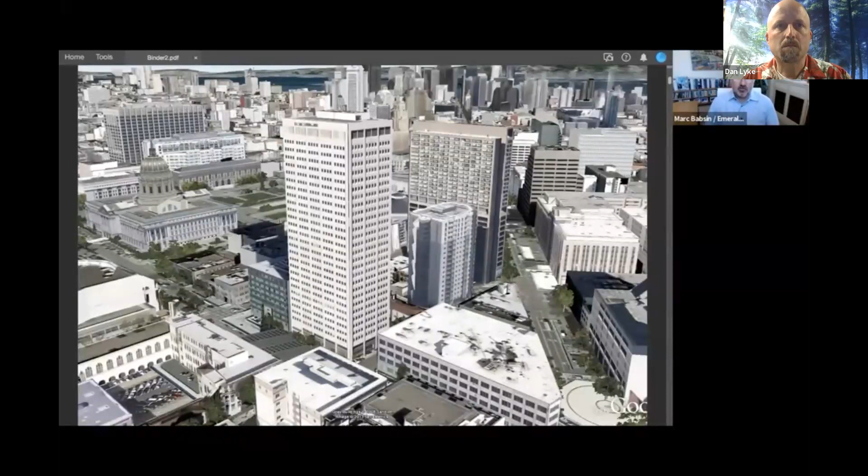100 Van Ness was the old AAA office tower. It was completed in 1974. It's 400 feet tall. It's brutalist design. It's got concrete skin with a steel frame, and it's very prominent in the skyline as it's the first tall building coming east from the Pacific Ocean. Next slide, please.

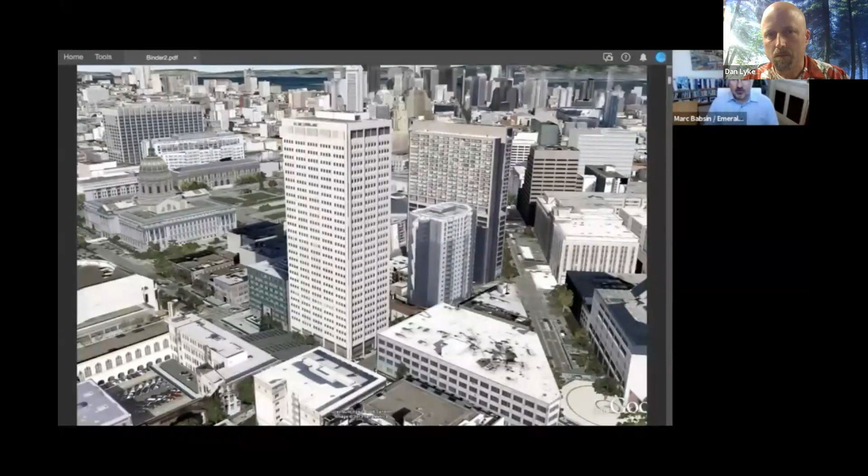AAA had 4 buildings, 3 of these green mid-century modern buildings. There was even a bridge, people might remember, over Hayes Street. And they decided in 2008 that they wanted to go to the suburbs. So they moved to Walnut Creek, and they sold all 4 buildings to a developer who planned to keep it as office, just to modernize it. Then you have Lehman Brothers in September of 2008 and the Great Recession. And by 2011, they hadn't signed a single office lease.

So you had vacant office buildings, which for a landlord is pretty terrible, but it also creates an opportunity for conversion, as we'll get to a little later. The equity, which was CalPERS, they were just tired of feeding it, paying every month on the loan, so they handed the keys over to the senior lender. It's good to be a senior lender in situations like this. It was an electrical union pension fund that took over and then brought us on as partners to figure out what to do next.

One of the things we considered was just reusing the buildings as office.

However, the mid-market Civic Center submarket had a 35% office vacancy, which at the time was the highest ever. We happen to be back at that number right now, but it was pretty shocking at the time. The other buildings that were our competition that were also vacant had large floor plates, which is what was attractive to the tech clients in the market. 100 Van Ness is much smaller at 15,000 square feet than what ended up being rented by Dolby, Twitter, Uber Square, all a block away.

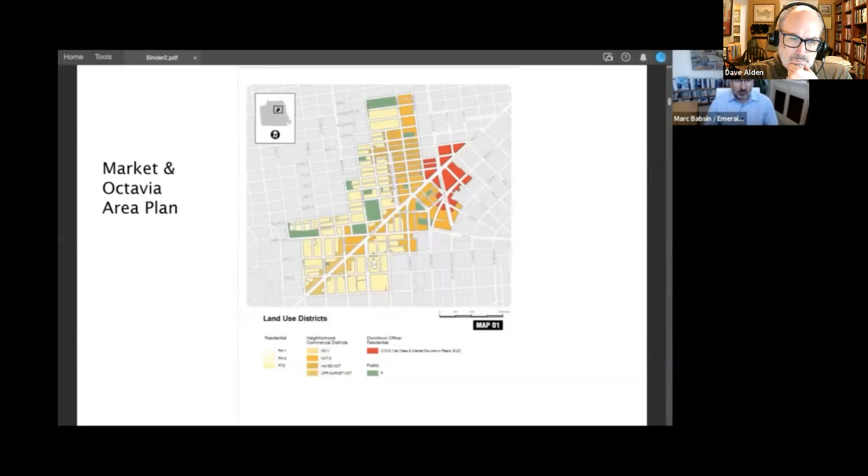So for office, doing TIs is going to be relatively low cost, but it was very unclear what the value of this building would be at the end. Residential, it's going to cost a lot more to strip out the building and convert it, but we were starting with a steel frame that we saved and foundations, and that's worth tens of millions of dollars. Also, there had been very little residential built for several years, so the rents were more promising.

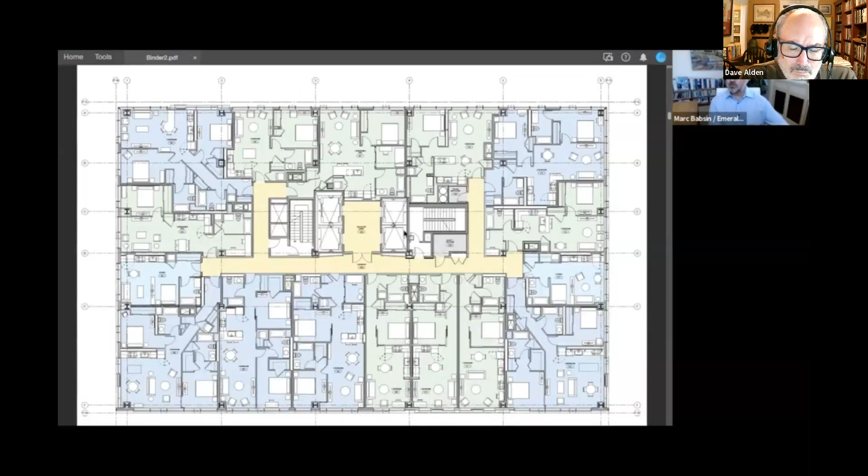This building also has a massive western exposure. Oh, excuse me, there's my phone ringing.

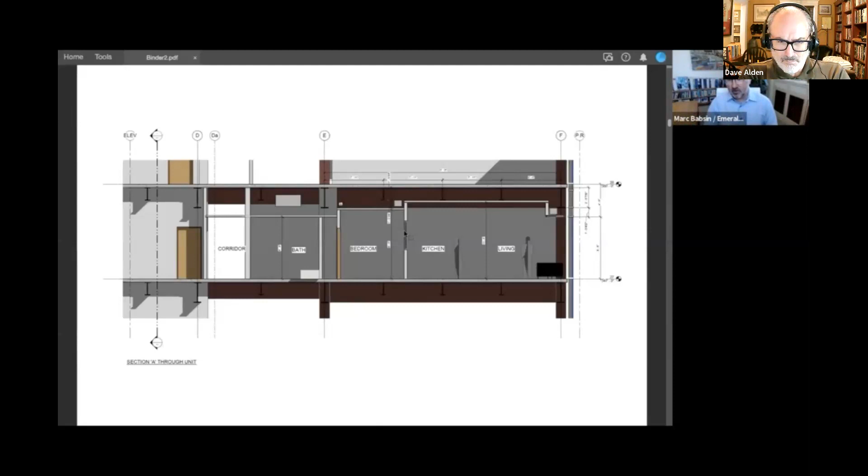Massive western exposure, which means it's going to bake in the western sun. So for the first time ever, Emerald Fund decided to do an air-conditioned building. We were able to do that because that horizontal band there is where the air conditioning fit in, and we still have 10.5-foot ceilings, which is very generous.

Depth, unit depth. These units, because of where the elevator bank was, are 44 feet deep. That's really pushing it. You really want to get into 30 to 35 feet. So that was a challenge.

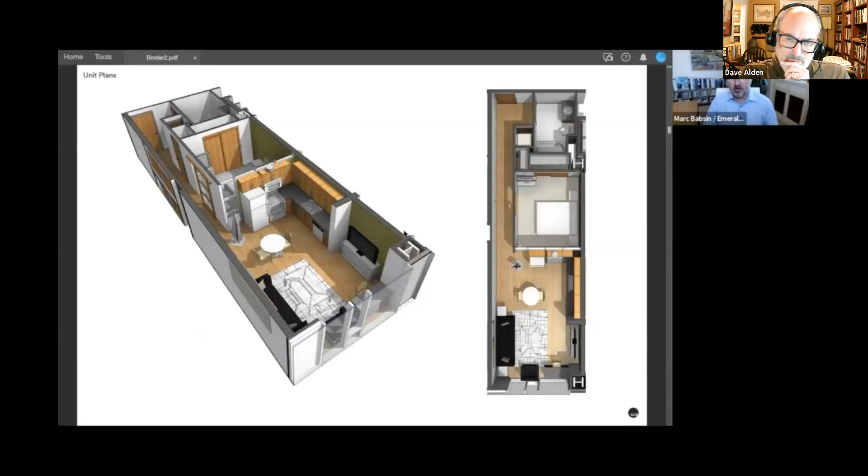We came up with the idea of, what if we put the bedroom in the middle? We put lights - you have to bring in light and air. We put lights over windows, over the cabinets and along the sides. The building department was okay with it. We were a little nervous about how the prospective residents would treat it, but to our surprise, they actually liked it a lot. We've used this nested bedroom concept a couple of times since then, and people like it. Other developers have kind of come onto it as well. So sometimes opportunities create innovation.

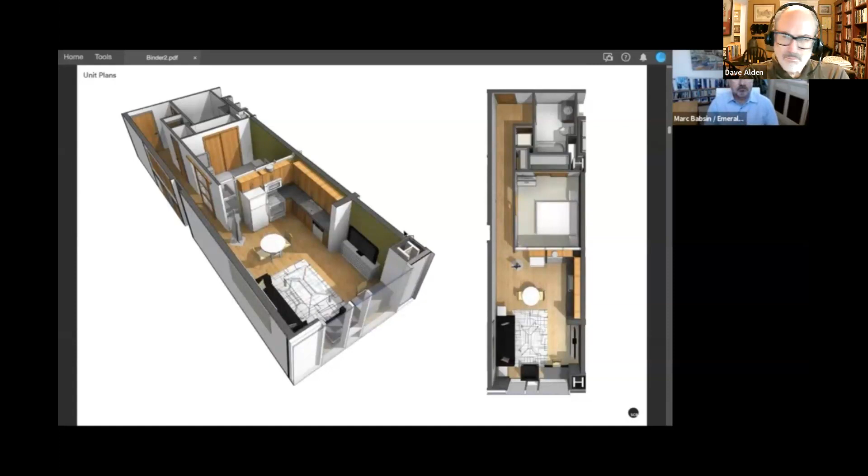Next challenge is, how do you build a building when your existing building takes up the entire lot? There was no open space, nowhere to put a tower crane. The project manager, Ross Asselstein, came up with what was initially a wacky idea that ended up being brilliant.

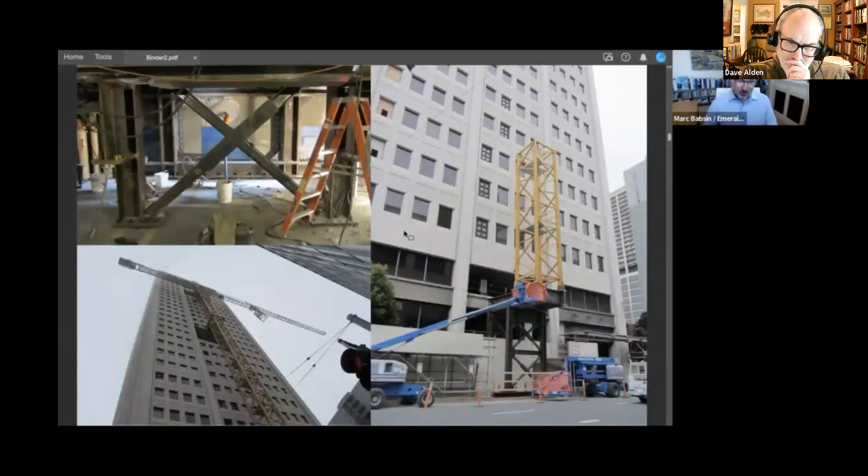Why not just hang it off the side of the building and have it cantilever above Fell Street? And so that's what we did. We had to take off 1,200 panels weighing tons each. This had never been done before, so the demolition contractor was figuring it out on the fly. There was some study, but then we took it off the building, moved it—it's very windy there—and put it on a truck.

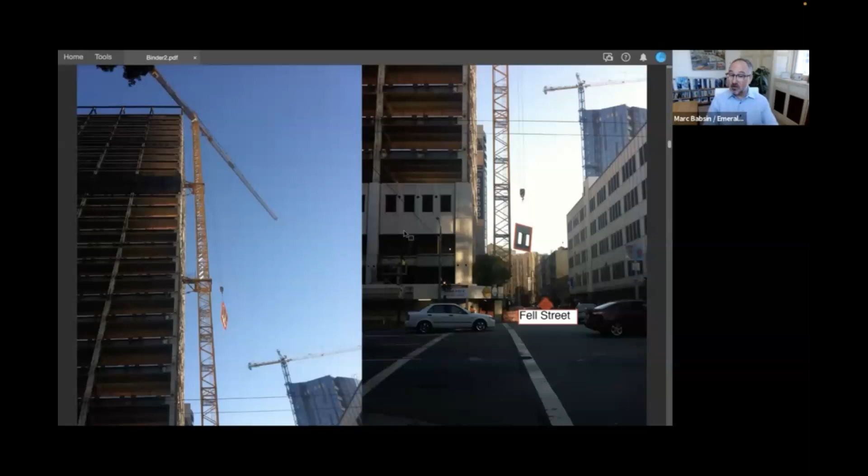What keeps a developer up at night is dropping a concrete panel on top of a car or a pedestrian on Fell Street. That didn't happen here. In fact, the project was named the best residential project in the country that year, in part for innovative things like this.

We had the luck of someone in Fox Plaza living across the street taking a picture every single day, so we had a great document of the stripping of the skin and putting on the new one. The reason we did this is, if you look in the top upper left, those windows were quite small, but you could see everywhere in this building. It's a view building, and they weren't celebrating the view. So we spent 6 months taking off the skin and 6 more months putting on the new one to really expand the view.

Another opportunity is the mechanical penthouse at the top of the building. Office buildings in the '70s needed a lot of area for their chillers and boilers, but residential buildings in 2012 don't need that much space. So we consolidated the penthouse and ended up with this phenomenal, one-of-a-kind 360-degree roof deck. I've been up there hundreds of times, and I'm still blown away by the view every time.

All the leasing tours end up here, and this is where we try to close the deal. This is 100, the tower, and at 150 we also took over the rest of the AAA site and built 150 Van Ness, which is basically the same size as the tower, just turned on its side—400 feet long instead of tall. It's 420 apartments plus 418, so 838 total.

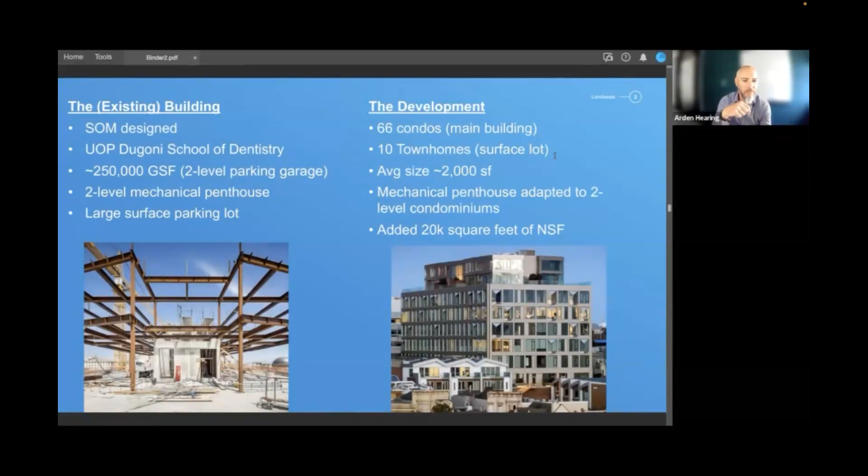Throughout the process we worked closely with our structural engineers, Holmes Structures, and were able to add about 20,000 feet of net saleable area by completely re-envisioning the building. We took the old entry to the Dugoni School of Dentistry and moved it to the ground plane.

You can see some of the heavy work on the left—that's almost a before, except we'd already taken out one of the levels on the north side of the building. You can see a lot of the steel bracing on the mostly concrete structure we had to go through, and how it started and how it went.

What we see is a theme here of potential retrofits of similar size and scale, but maybe not in Pacific Heights. It started with a great location, a great form. The building did not meet seismic code, as it was 50 years old. It really felt like it was built as a fortress, but it came with this entitled height. If you just had a surface lot today in Pacific Heights, you'd never get the neighbors, supervisor, or anyone else to endorse a 160-foot tower. So having that in place really streamlined our entitlements.

One of the constraints was really deep floor plates, which Mark mentioned was difficult to deal with. At 100 Van Ness, Mark dealt with that by nesting the bedrooms and doing multifamily—that's one way to do it. What we discovered at the Pacific is that, given the neighborhood, we were able to pencil large units for an even higher per-square-foot value. So we broadened the units, brought in air and light, and expanded the window line, pushing back 40 or even 50 feet in some cases, making them feel like actual single family homes. We had a lot of 2,500 and 3,000 square foot condominium units. We also anticipated a cost and schedule benefit given that the garage was built and the bones were already in place—what could go wrong is sort of how it felt.

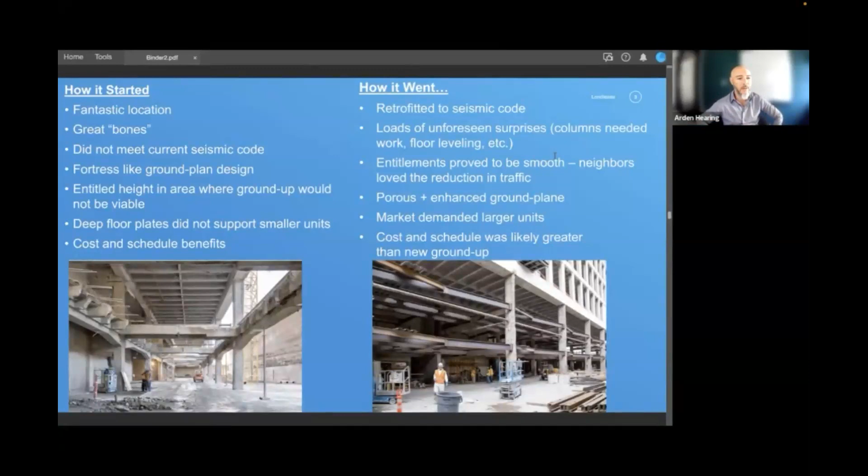So that's my short on the Pacific. I think there's one more slide, but there you can see the penthouse retrofit. Okay, thank you, and I think that was it there. Now let's flip ahead to the 2830 section.

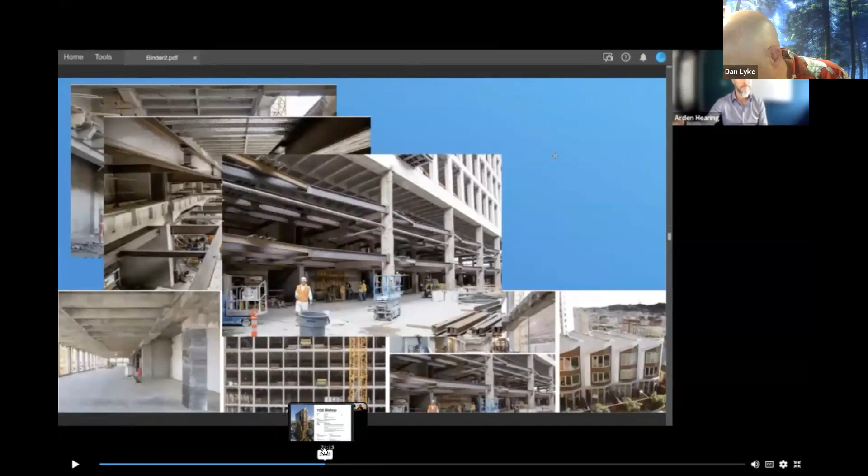While I'm seeking here, I recommend going back and watching this other section because it's actually the only part that had kind of 80 to 120% AMI market units, but there's a bunch about it that was kind of out of scope, so I understand why Dave said skip it. Anyway, here we go.

This is in Chicago. Obviously an iconic and much beloved building, and also a historic Chicago landmark. The towers, the landmark, and also some elements of the lobby. In this case, we converted the building into 162 luxury condominiums.

This building had some similar challenges in that the lower part of the building had extremely large floor plates. So in this case, we decided to actually remove some of the square footage and create 3 new facades facing onto a very tranquil courtyard in the middle of the plan.

That gave us more typical residential double-loaded corridors and depths in which to plan efficient and graceful units. In the tower, the challenge was that the floor plates were really too small for current office demands, but made excellent residential floor plates. The building had some beautiful details and ornate openings that we were able to leverage into the condominiums.

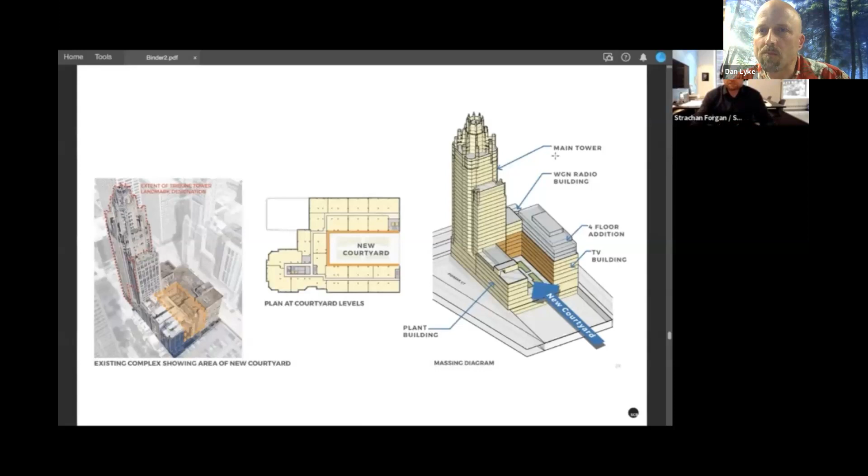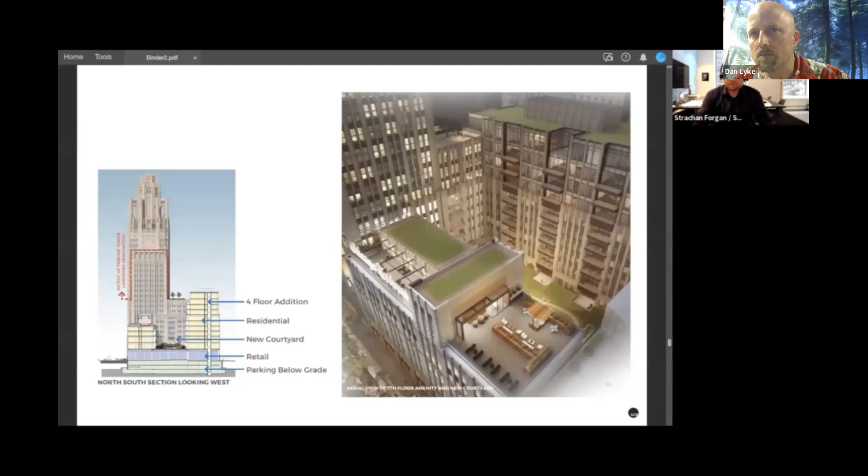This shows that kind of typical floor plate before you get up into the tower. Again, showing the existing original tower on the bottom left, the new pool amenity on the right wing, and then the new addition at the top of the page.

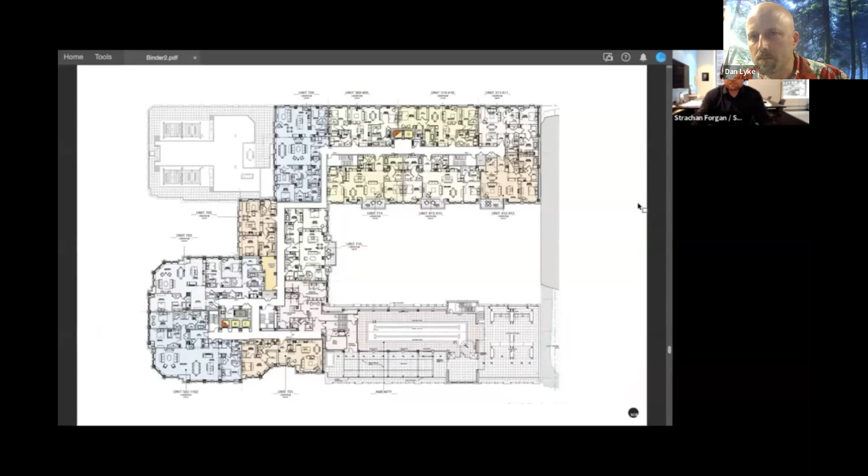From the new pool addition and the amenity, we're able to get these wonderful views out towards the Chicago skyline. We actually took the famous Chicago Tribune sign down, refurbished it, repurposed it, and put it back up so that some of the history of the building was maintained and became part of the iconography of the space.

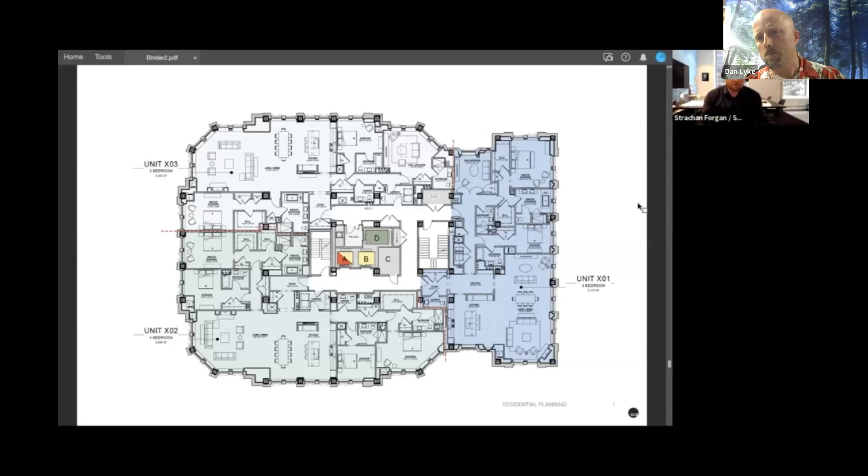To Arden's point, sometimes it can be a little bit easier if you've got large units to deal with the various nuances of the floor plan. In this case, we had 3-bedrooms that were roughly 3,000 square feet, and 4-bedrooms up to 4,000 square feet. So large luxury units that really are able to use a lot of the deep space in the middle of the plan for large closets and bathrooms and so on.

This is an example of one of the 4,000 square foot, 4-bedroom units that sound like huge units in comparison to what we work with in the Bay Area typically.

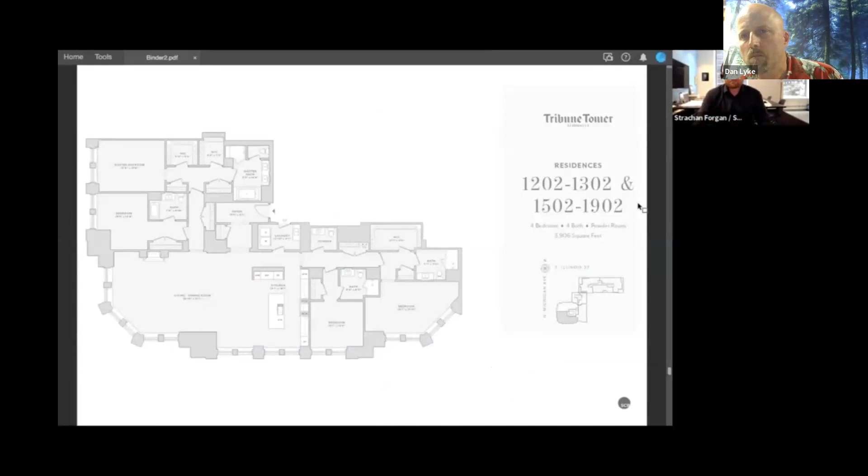A fairly transitional aesthetic to the interiors, something that we felt was light, modern, but also in keeping with the historic architecture. Just an example of one of the islands in the kitchens.

What we were really pleased about is how we could integrate some of the character of the existing building and not erase it at all, but actually bring that into the interiors as well and really celebrate and leverage those beautiful details, including some pretty dramatic taller floors that were in the tower that we could work into the residential units.

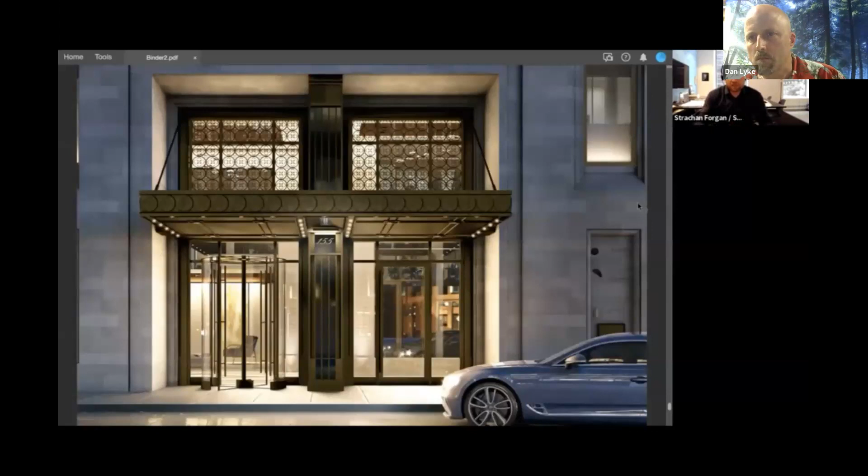Where we did make incisions to the outside, this was a new vehicular drop-off that we created. We wanted to keep the architecture again in keeping with the exterior.

We had some wonderful moments at the top where we created amenities, but we're able to still experience the features of the building, the buttresses and the ornate detail, and look through that as a scrim out to the views of the skyline. That's it, I think. Yep, that's the last one.

I just want to make a couple of comments before I introduce our two local architects on ways to increase housing production. One couple things that I picked up, and again, I've watched this video several times now, on the Van Ness project, which in some ways to me was the coolest of those projects. That's not fair, the Tribune building was great, but Van Ness is the closest one to us.

The economics of redoing that building to residential were so marginal that it took the equity owner walking away from the project before it made sense. And on top of that, the timing of it, as the speaker today said, in 2012 it made sense for them to go residential. But by the time they were halfway into the remodeling, the market had turned enough that if they hadn't already begun it, they would have stayed office. So it's really close on whether the office to residential conversion makes sense, if it takes that close a decision.

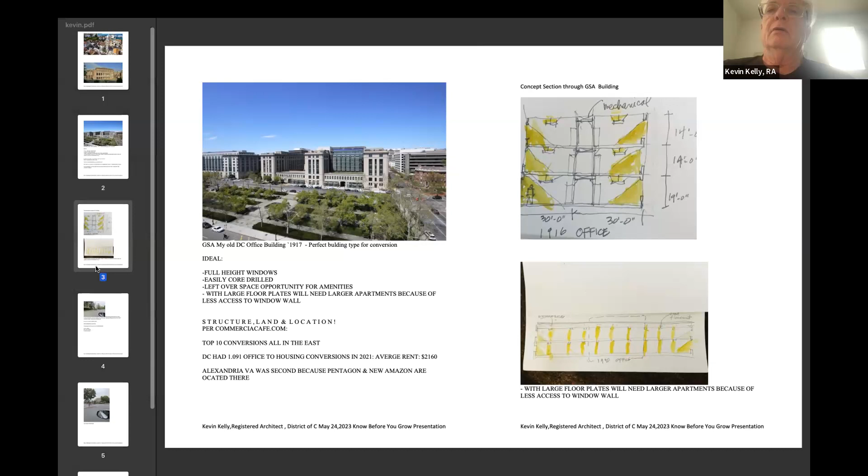So what I did today, I've been thinking about this, very much what Dave was saying, that Petaluma doesn't have any GSA buildings. It doesn't have a lot of the buildings that have the things that would justify a conversion. So I went to the gym over there at Club One this morning, and on the way back, before lunchtime, I drove around and looked at these parking lots of these buildings that we have.

Petaluma, I looked it up on commercialcafe.com. It has 575,231 square feet of office space available. Think about that - that's beginning to get to the square footage of one of the Twin Towers. So it's huge, but only 2.3% of that is considered Class A, which means it's really modern, everybody wants it. 85.1% is Class B, which means, yeah, it's okay. And 4.1% is Class C.

So I drove around and said, look at these parking lots. Maybe we need to take the idea and turn it upside down or inside out. Maybe these parking lots are where we could very economically build housing above parking and use the existing office building for things like a grocery store on the first floor, a daycare center, and maybe have 2 floors of renovated, desirable offices.

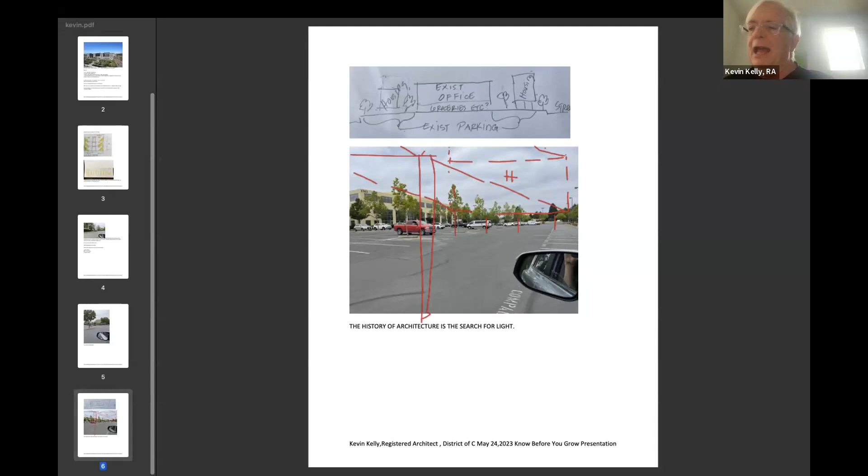The interesting thing is, 25, 30 years later, I was working for the federal government. And those buildings, which had such low floor to floor and were so unpleasant, were exactly the ones that today are vacant. Those are the ones being torn down, having atriums cut into them so they're not so dismal. But I think it's very interesting that I was there when the stupid decisions were made.

Thank you, Kevin. I'm still chuckling over, I was there when stupid decisions were made. I think all of us at one point in our careers can say that.

One thing I will say for everyone's benefit is parking will be an ongoing topic of conversation. Those of you who've been involved with Know Before You Grow for four or five years have heard us talk about it. I'm heading off to a couple of conferences next week where some of the national leading experts on parking theory will be talking. I hope to secure some of them to at least appear via Zoom with us, because it's a topic we really should be covering. There are lots in this town that are just ridiculous. So Kevin, thanks for bringing it up.

Moving onward to Ross. I've known Ross for years. After a long sojourn in the Northwest, Ross came back to Petaluma around 2006, 2007. I heard some interesting things about him, so I just walked in the front door of his office one day and said, hi, we need to talk. We've been engaged in different things ever since. Ross has a long history in all sorts of different housing options. I probably don't even want to try to recount everything, Ross. But he did a really interesting study on a building you will all know here in Petaluma. I was with him on at least one walk through the building, so it was a good experience, and I'm looking forward to having you share that, Ross, even though your vision never really happened.

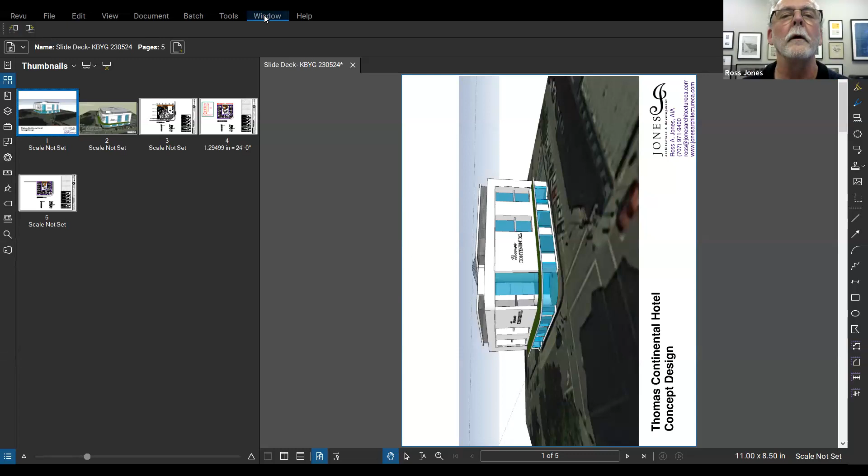So go ahead and put up the first slide, and while you're doing that, I'll give you a brief introduction. I'd want to let you do the slides. Oh, so it's not there? Okay, then share the screen. You can share the screen. I can, yes, I can go back and find the slide if we need. No, that's okay. So now if you did it, then go to that whole landscape. I'm going into presentation mode there. Yay, cool, can you see that?

Yes, okay, excellent. So I'm a fifth generation San Franciscan. Some of the evidence is behind me on the wall. I won't go into that, but when my parents divorced, I was shanghaied to Seattle. Never really acclimated to the weather or anything up there. Got back here as soon as I could, it just took decades. So I went to the University of Washington, became an architect because in seventh grade I decided to become an architect. It was safer than a race car driver, which is my other interest, automobiles.

I went to the University of Michigan for my graduate degree, graduated there in '84, came back to Washington, got a certificate in commercial real estate development, augmented that with a certificate from Cornell in hotel development and real estate analysis. So I've been practicing as an architect and developer. In my formative years in Seattle, I spent a lot of time doing core and shell analyses on high-rise buildings, then executing tenant improvement projects, both as building standard architect and as a custom architect. Once I concluded that, I spent 15 years as a specialist in seniors housing all across North America, different building codes, different jurisdictions, different cultures of interests. So a lot of that has created the person, the architect that I am.

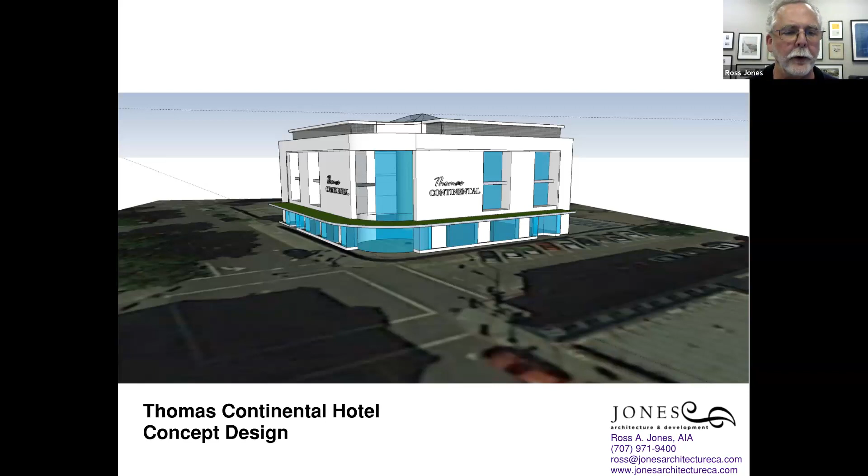If we go to the next slide, what I hope to convey to you is what some of the hurdles are, which are in the form of regulations, and then some tools that you can take away from this. When you go to other buildings, maybe use some of the tools that I'll share with you to see, is this a candidate? Is this a good candidate? Because ultimately, in a lot of these situations, the answer, is it good or not, is it depends.

Now, regulations. We have the authority having jurisdiction, and by that, in these cases, I mean specifically the planning department. Is the property zoned either mixed use or residential or some combination that will allow the use to happen?

The CBC is the California Building Code. Residential has a lot of construction considerations that office doesn't have. Simply stated, your acoustics between floors, between walls, can you hear your neighbors? Who cares that much in an office? But in a residential setting where it's quality of life, it matters a lot.

For example, a very high-end senior living project I did in Bellevue, which was for the top 1%, was a very different building than we had ever done for this client before, who had done lots of senior living projects. I said, don't you want to elevate your construction of the walls and your floor ceilings, because these clients of yours aren't used to having neighbors? They said, no, we want to do it the way we normally do. Bad decision on their part, because that was one of the elements that dropped the quality of that building.

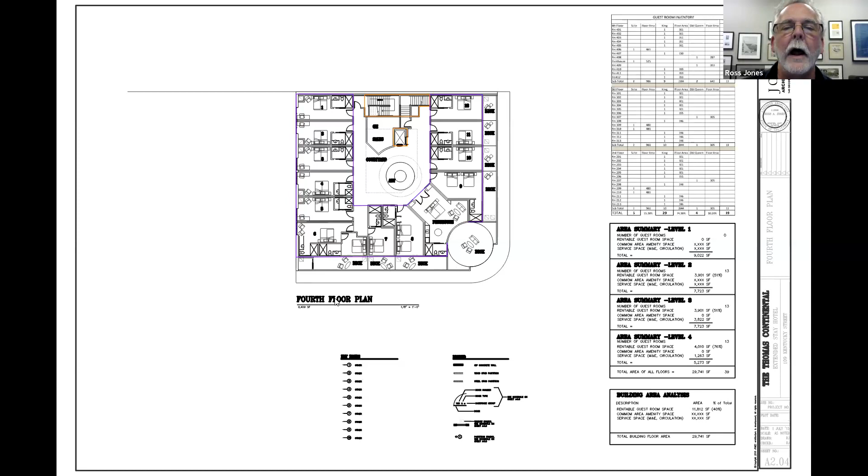So a lot of the ways that these kinds of projects get done is through private capital or through other government-sponsored tax credits. That's all I want to show you on the second and third floor, because the fourth floor is just an iteration of that, but we had some more hospitality space out here, so it's really nothing different. So I want to go back to the first floor, and I'm not sure if I can zoom in on this.

What I wanted to emphasize, I'll go back up here. The exiting capacity has to be a certain size, and the exits have to be a certain distance apart from each other. You can't put them side by side, and then you have your vertical circulation.

So one of the things that made this adaptation to this building so expensive was we moved all the stairs. We moved the elevator because it was stuck back here in the corner, or not even in the corner, out of the corner. It made no sense whatsoever for what we wanted to do. So all of these decisions to make efficiency up above carry down to the first floor.

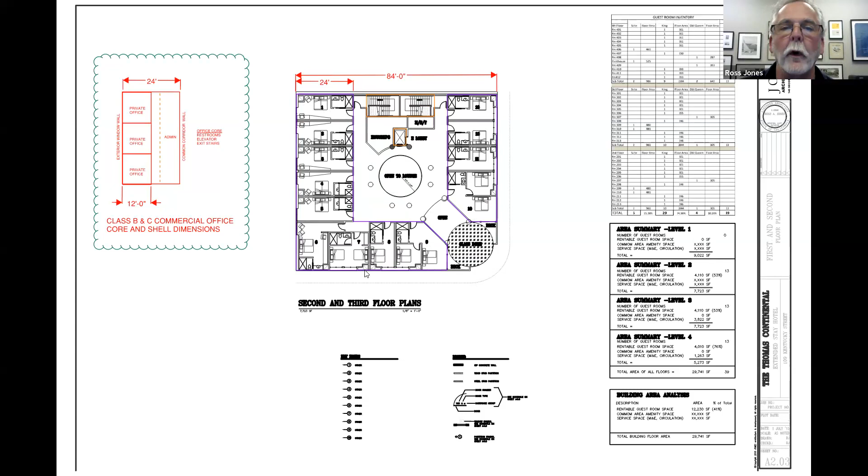And now that we're down here with the stairs, that's a nice drop right down. Now we can go out to the alley, which the building officials said yes, we'll accept that because it's an accessible right of way. And here we're out to the street, another accessible right of way. So that's good. Coming out of the elevator, which is not a required exit, doesn't matter much, but you still want to make sure people can see a visible way out of the building.

Now, another aspect depends on the setting. In a downtown setting like this, the planning department generally prohibits putting residential units on the ground floor, and it makes sense. It's not very private to have residential units on the ground floor. If you have a bunch of parking out here, you can landscape and create privacy. But the other aspect is the cities want to have an interactive street front. They want to see activity.

Even when I've done senior living projects in an urban setting and we've had our dining room here, they said, can you make it open to the public? Because if it just looks like a club, that doesn't activate our street much. So this became was proposed as a Buku, which is a restaurant down in San Francisco, and this was part of the retail that was to keep this section activated.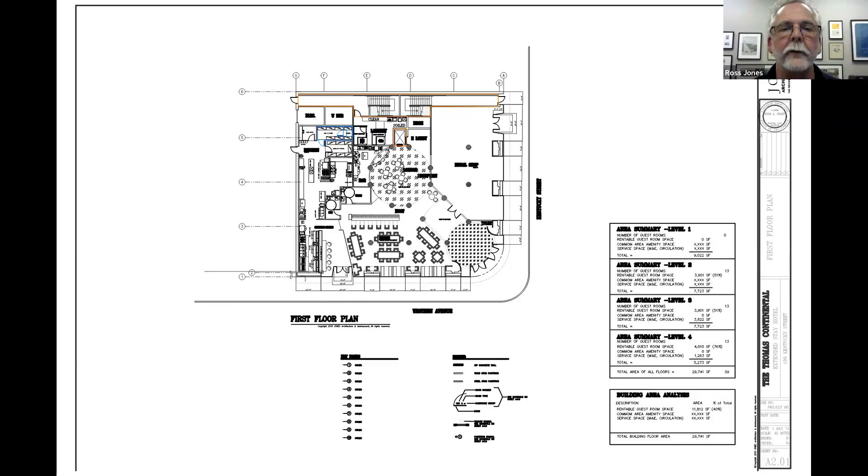So there's a lot of things that go into this. It's the code regulations that are going to drive up the costs, that are life safety. You can't, don't argue life safety. There are planning considerations that you can and maybe should argue, and financial conditions that you will probably have to argue for. And then your core and shell standards, finding the right fit.

As someone told me when I was looking at the Silk Mill, trying to turn it into a beer and wine venue, the guy, a potential partner, said, 'let somebody else break their pick on that one.' So developers get a bad rap, but they spend a lot of time and money of their own trying to find the right deal. So when they do find one that works and they make a lot of money, it's not all gravy. A lot of it's filling the hole they left from the previous misses and failures.

So I hope I've made the right point on that.

So I'll release my screen unless we want to take any questions on those exhibits.

Yeah, I have one question. This is Kevin. A really excellent presentation, and I think that building is a bear to do anything with. I see that you were able to puncture the exterior walls there on the sort of right.

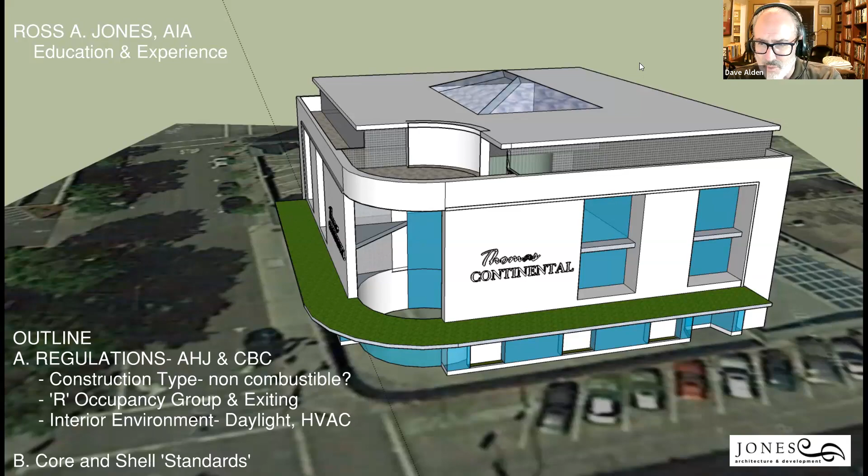The topic tonight was office to residential conversion. But what we heard from the mayor is that in Petaluma it may be retail to residential conversion that's truly the challenge. I think we heard from Kevin that his solution is don't even try, take the parking lot, put 4 stories of new residential there, and use the existing building for something else. Let me give an example, and this is not a specific real example, so don't anybody quote me on this.

What if tomorrow Whole Foods wanted to go out of business? What would you do with that site? I know you can't know until you dig into it deeper, but just off the top of your head, what would you do with the Whole Foods site? Either one of you, feel free.

Be interesting. Well, what works in Petaluma is a gym. Not another one. Somebody's going to want to move, we are so thick with them. Yeah, no, that's true. It would be a good gym.

Would it then work to put residential in the parking lot? I think you could put residential above the parking lot, you know what I mean? A podium, with parking at one level, or maybe you have less parking.

There is, next to Whole Foods, I think subsidized housing - there's a little interesting alleyway of housing right there. It's a PEP housing project, yes, subsidized. I could imagine something like that working there pretty easily.